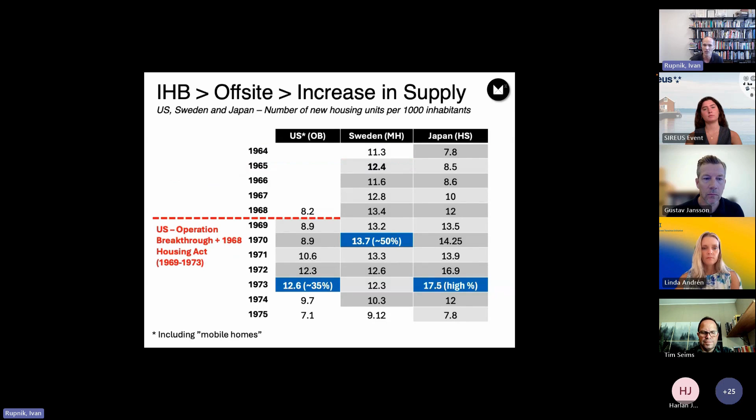So in the 1960s, there was success in government-led actions in Sweden, the Million Homes Program, in Japan, their housing system certification program, and even in the US, Operation Breakthrough, all produced some of the highest housing supply as measured by new housing units per 1,000 inhabitants in the history of all three countries.

Offsite construction was a big part of it, where in the US, we think as much as 35% of the housing produced at the historic peak of housing supply was produced in a factory. And in Sweden, our colleagues in Sweden have shown that as much as 50% of the peak production year in the history of Sweden was produced offsite.

In Japan, we're still trying to get the right numbers, but all three countries were really the housing supply winners of the 60s and 70s, and industrialized construction was a big part of that, as was overcoming, at least temporarily in the US case, certain institutional barriers to acceleration. And all three countries experienced one of our first, and unfortunately not our last, global energy crises and recessions. But those three countries had very different survival rates for companies that were developed during these acceleration actions.

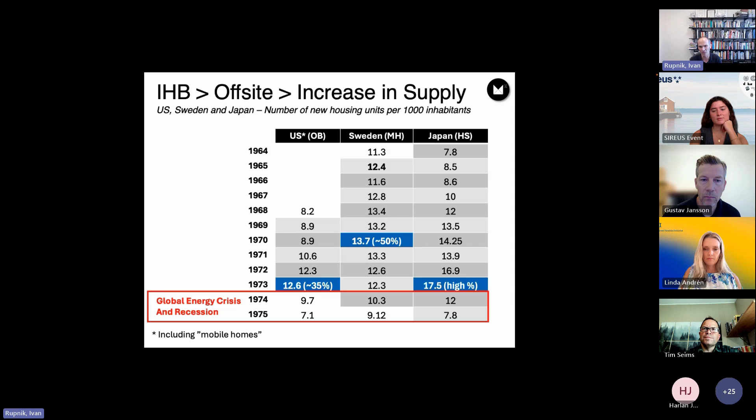So in Sweden, just to close, what we've noticed is the long-term development of a national innovation system, one that connects government, industry, NGOs, and academia through a quad helix, through strong partnerships, something we learned when we visited Sweden last year. That has also supported regulatory reform by the agency Boverket, which we've also had the fortune to work with and will continue to work with, where now regulation balances the need for life safety with human comfort, innovation, affordability and sustainability.

Also, Sweden has been using market demand aggregation, particularly through its municipal or public housing agencies, to accelerate production further. And what we've really been impressed with is to see that a national innovation system built primarily to increase housing supply has also been able to pivot to carbon goals, which is something I know Linda's also very excited about talking about.

So we're really interested in seeing how countries like Sweden and Japan have built an institutional framework that can address current societal challenges, but can also, without major government intervention in the future, at least structural reform, continue to address new challenges as they come up with a strong housing sector.

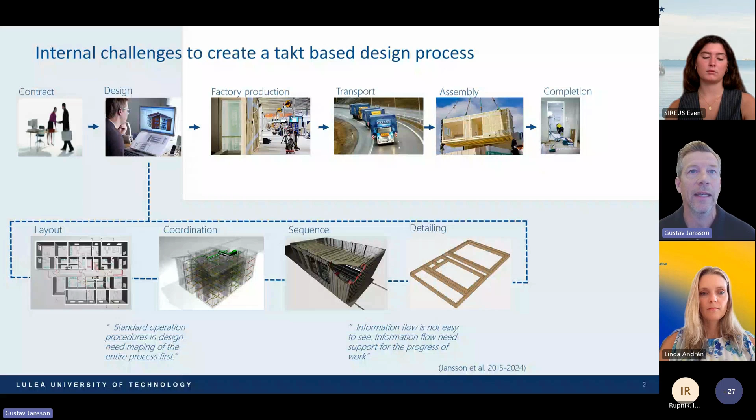But you not just have the internal challenges, you also have external challenges like project-oriented culture in design. You have rules and regulations that are not the same. What we have seen could vary a lot between the countries, but also down to city levels in different countries, that you have to follow and handle in some way. And that was a little bit what Ivan was about, how to make this easier to handle for industrialized construction, especially for this type of buildings.

And there is also to handle this project customization, because you need to have this to meet the market and also the site and also the customer use for that with predefined products. And the products do not need to be fully defined, but as much as possible. And that comes to the platform concept later on.

And we know that we have long lead times for decision making in design, not just in our internal processes with the suppliers and so on in the organization, but also on the client side that has to take the decisions according to alarm systems and locking systems and ventilation and regulation, and also in their chain, and come back to that. So that takes a little bit to have those decisions for the design.

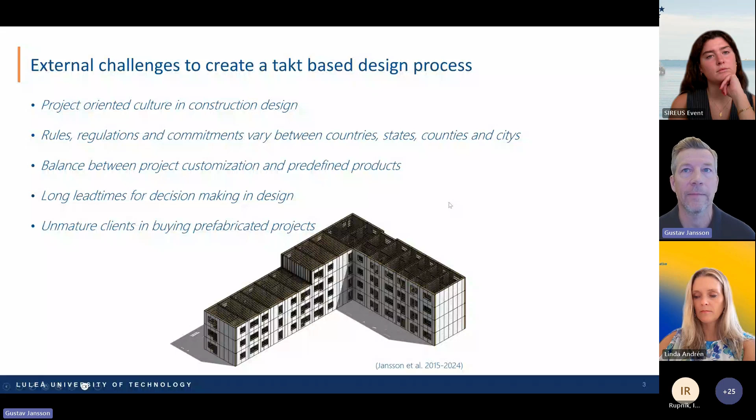But back to my cornerstones for this presentation, and that is the 3 cornerstones: platform approach, to have that in that case. But also be aware of the importance of a good information flow for design. And the third one is to manage a parallel process for design. So I will go into platform approach first.

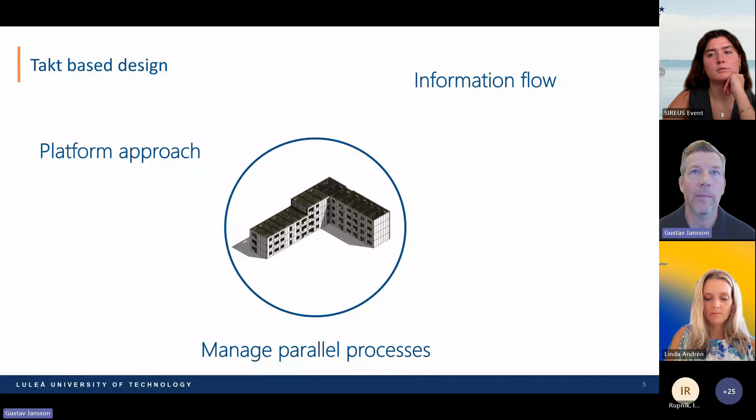So often you think about the platform as a product platform, and that is central when you have industrialized house building. And if you start with the picture above here, you see an apartment divided into 2 modules, volumetrical modules, and you have some rooms, and you have window openings and openings for doors, and larger openings also. These are predefined according to some regulation, not just the position itself, but maybe the specific type of opening and so on, and how the connection point between the walls and between wall and floor should be, and also the elements itself.

Maybe the level height could be locked in that parameter, but maybe the length is flexible in some millimeters for the production or the transport. On the next picture to the right, we have a little bit more detail. You have some studs showing up, and you have rules for how they are put out in the walls, so you don't have to do it manually. Also around those openings, you have regulation for how it will be in a rational way, so you don't have to put this in manually in your CAD software. So you have that generated from what you have predefined.

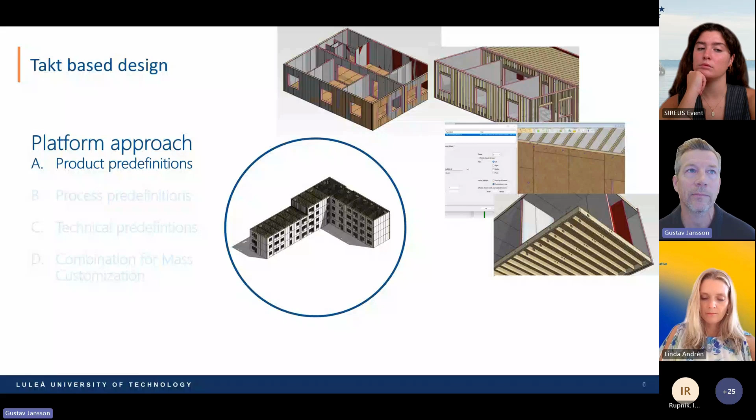The next one is the process predefinitions, and here we see a colorful planning schedule with the colors representing different disciplines. So this is a design phase where you have the project manager in light blue, sales in pink, green is structural engineering, and purchasing is yellow, just to shortly go into that. But it's important to have something to lean on, a predefined process for design, so you can maybe stretch a little bit because we don't have the time for that.

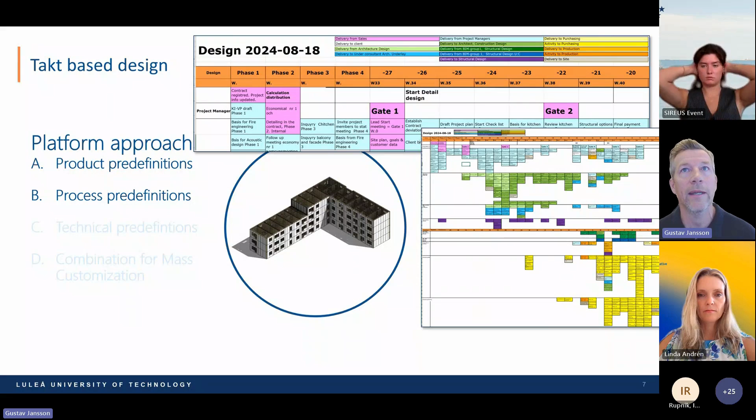And that is important to understand, that you have one thing to lean on, according to which we are all in this boat to have these deliveries for each activity. And those small cards that we call them, each one has a lot of tasks and so on. So it's formed according to a standardized way of working.

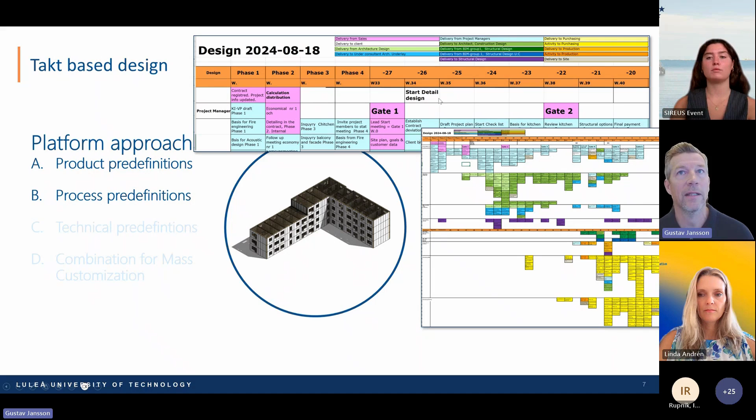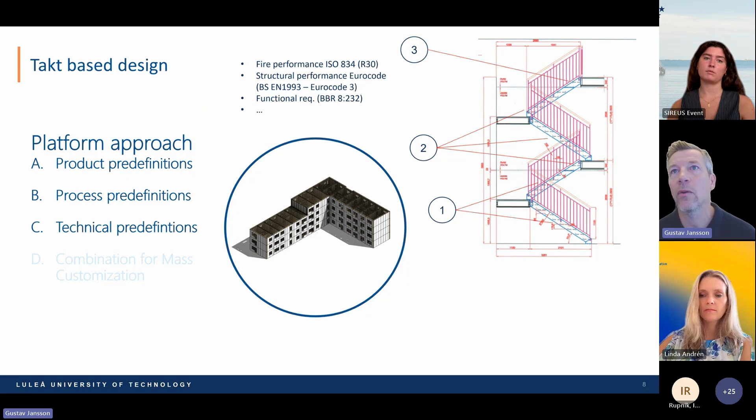Over to another one of the predefinitions, the technical predefinitions. Technical is a quite vague word, but it describes the product and the sequence of how to produce it, but also some technical regulations. If we start with the stair that we see in the drawing to the right, I can maybe show you with my cursor. The first two stair parts are assembled in the factory up to this level. I hope you see my cursor.

And here the level is level 1 in that case. But the small part of the stair does not belong to that one. It belongs to the next module level. So it's not assembled in the factory. It is transported up here in the upper part, module level 2, and assembled on site, because it has no support when it's transported. And the same thing for the next one. This is a technical solution that is predefined and standardized in that case.

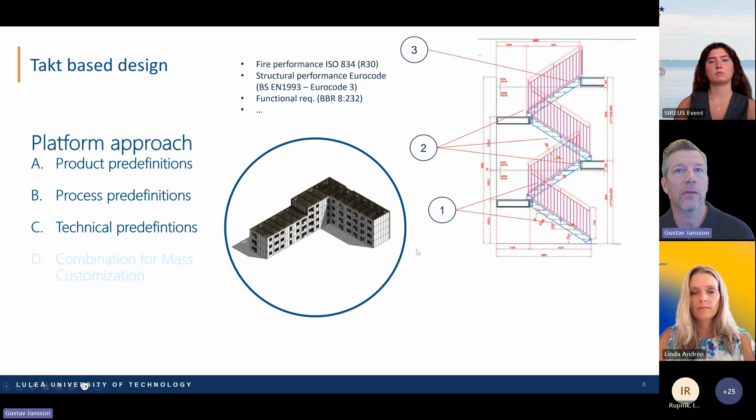And also from a regulation perspective, according to fire regulation, structural performance, and functional requirements according to the use of the building. So this is another way of predefining technical solutions.

The fourth part of a platform is the combination of product, process, and technical solution according to a sequence. And then you have something that's called BOM. It's traditional in the manufacturing industry, bill of material. You're breaking down your product into pieces, and we do it now. If you look at the left part here, we have project levels, and then you have modules, elements, and parts. And this is an engineering BOM, which focuses on the product itself.

And you have a labeling of each object in that case. You cannot label everything manually here. You have to be supported by either a CAD software tool or a system that puts that labeling on. So you have an ID for each object, so you can plan that for production. But after that, you also need to put the manufacturing sequence on that. So in a manufacturing BOM, you have that.

And that is not the same as the engineering BOM. So maybe you have another sequence of producing. Maybe you gather all the studs somewhere and cut them in one sequence. And then you have assembling of different parts to create the whole product, the building. And that is also an important part of the platform approach, to handle the breakdown of the product.

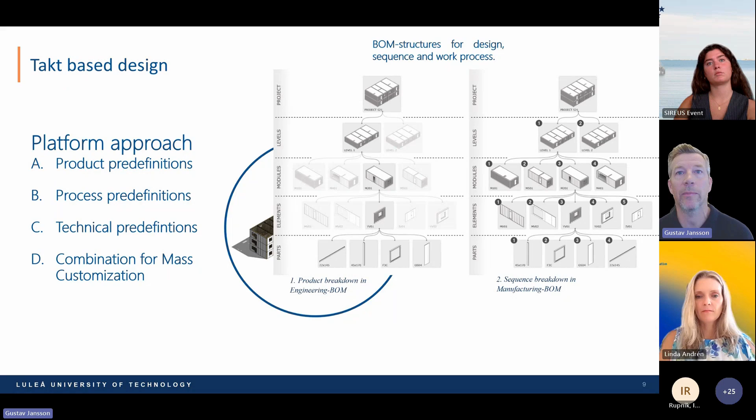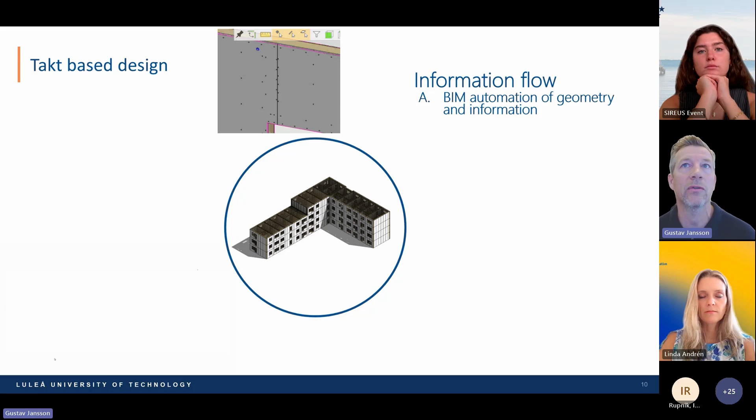You call it sheeting sometimes, and you have positioned this not just in the corner, because then there become cracks in that corner. So you like to push it a little bit over the window. And then you have the nailing here according to regulation. This is made by the CAD software, by automation. It generates those as a suggestion, and then you can fine-tune the parts as you like. This is really important when you make changes, that you can regenerate it by automation, so you don't have to model it again and again.

And the second part is to generate the output from the BIM design process, so you can generate shop drawings like this. You have both sides of the wall, the studs inside the wall, and a BOM list of all the components of the wall in that case. But also machine files that you send to the robots and the machines in the factory, so you don't have to program the machines manually. That has to be much more rational, and it is done in that one.

And the last thing about information flow is that you have an overall system that structures the information downstream, not just machine files, drawings and work instructions, but also for the product itself. So information about the components follows the product through the value chain, so the customer can later take it with them with the product. But also upstream information flow for improvements, to improve the entire process of producing these buildings.

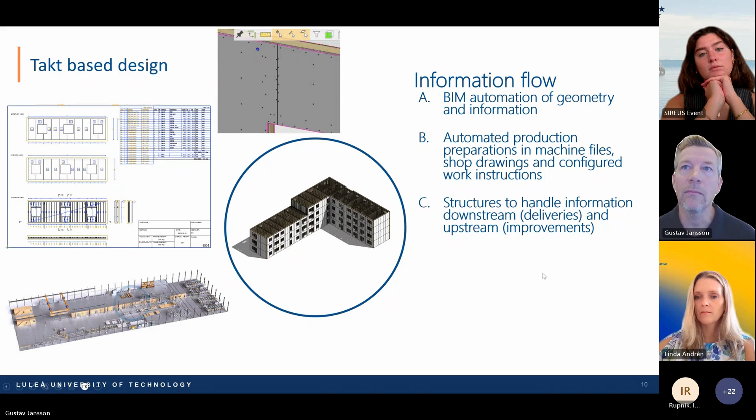But over to the last cornerstone, that is to manage parallel processes. If we say we have takt time production, we have a project of 200 modules, and we have a pace in our production of about 50 modules per week. It takes about 4 weeks for each project to pass the factory. And then we understand it's hard to match that with the design phase of 20 to 24 weeks. It's hard to match that with 4 weeks.

So we need at least 20 to 24 weeks for all the decisions that you have to make in design. We understand we have to have about 5 to 6 parallel projects in design then. So that is important to understand, that you don't just run one project in design for one project in the factory. You need to have parallel projects ongoing in design, but also match hard and easy projects in design.

And hard projects are the ones that have a lot of complexity in design decision making. And also if it's a small project of not so many modules, it will have less time in production according to the speed there. But the easy project has high repetition, follows the platform definition well, and has many modules, so you have the time to do the design. But the match has to follow the entire flow of production in the factory.

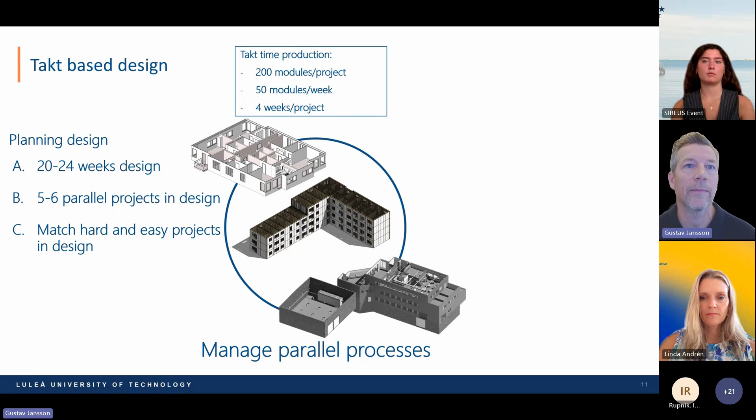And the other side of it is progress control. So you understand in which status we have our BIM model on layout, system, element and component level. So we are secured, we have locked those parameters for the different parts. And this also secures DFMA, design for manufacturing, for factory and site. So it's buildable both on site and in the factory.

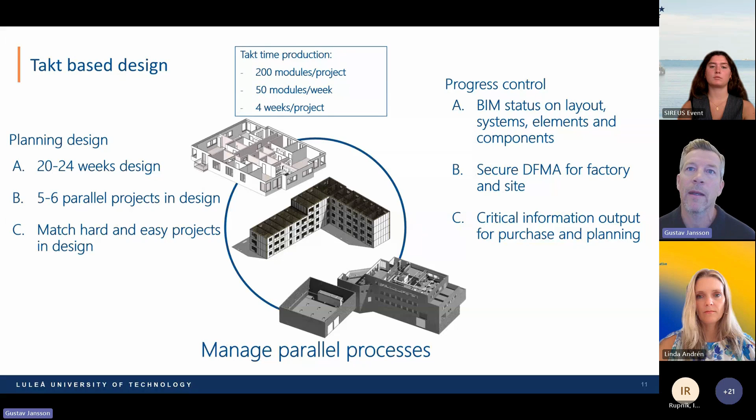And also the output from design of critical information for purchase and planning. If you have specific items, say stairs or windows, the supplier has the time to produce it so it comes back before assembling. So these were the three cornerstones that I'd like to present.

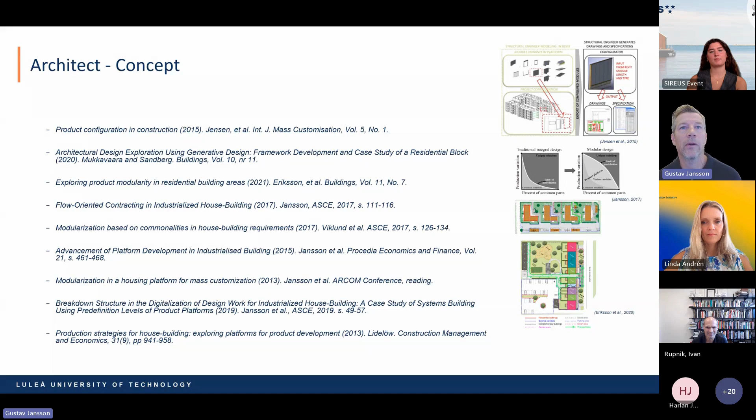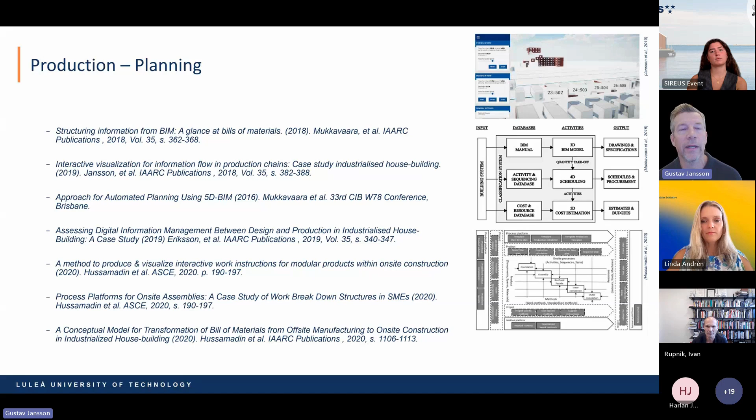And I'd like, since I have the time now, to just shortly present our publications about this. This is from an architect perspective, more on the concept of the product, a number of publications we have done in our division, but also from an engineering design perspective, how you manage the design work, and also production planning using different technology, from a more management perspective, and also supply chain and logistics in the planning, and business models for productivity. So that was my presentation. Thank you.